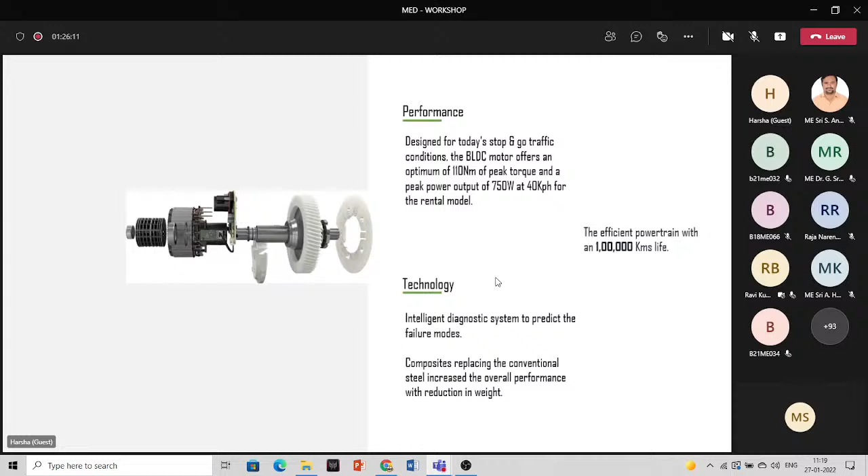Guys, you can raise your hands for any question. Whatever doubts you have, you can raise your hand. It doesn't have to be about the company—you could ask about any technology part or the electric vehicles part. You could ask about anything, like company formation or how to build a company. Anything at all, because after probably 11:30 we'll start our new session on the shift to electric vehicles, which will be more technical.

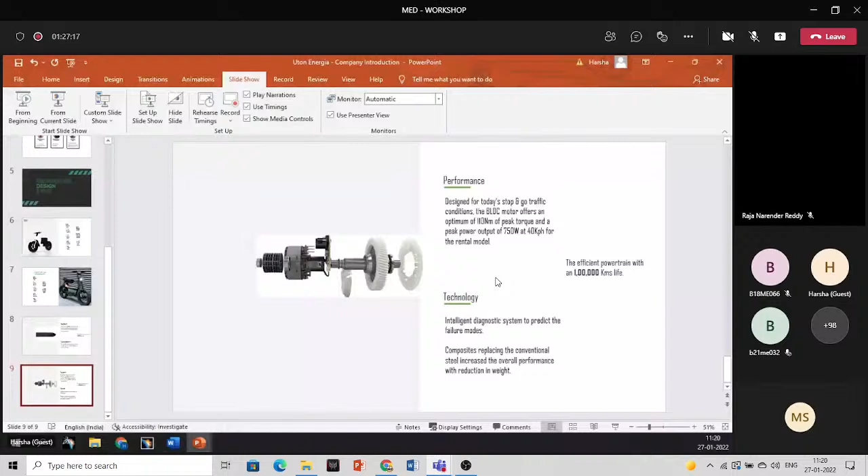Yeah, thank you, Harsha, for a wonderful presentation.

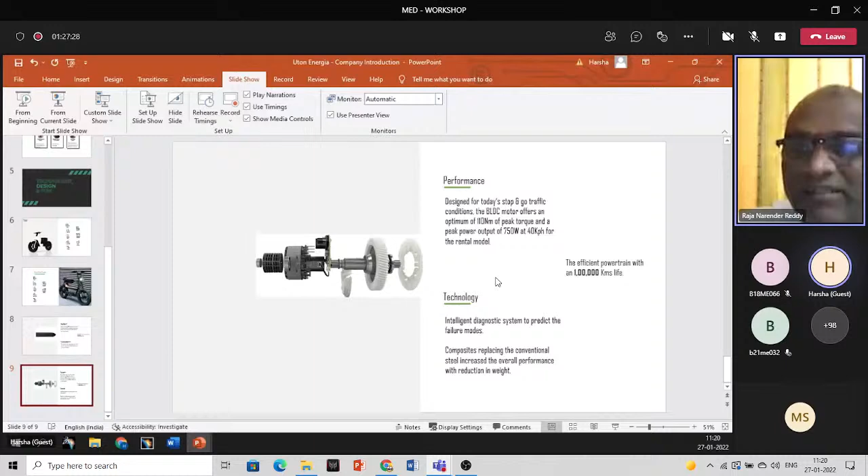Thank you, sir. While others think of questions, can you please share how you got the idea for starting this company, so other people can think about it too?

Yes, sir. I'd really have to mention one point I forgot—the technology entrepreneurship program in the college. I forgot to mention that, because you were also part of it when we were in college. You and Srikant sir were initiating us to do this.

I'd say that helped us, first of all—and I'm not saying this is only about building a company alone. Whenever you're doing a final year project or have been assigned different tasks, there's a different approach you have to stick to. That's what I'd suggest to everyone here, everyone present—there are different aspects to it, it need not be a conventional approach.

It need not be an approach that is already present. You can build your approach in a different way. What I suggest is to start thinking, build your own approach to what you want to do in the long term. So when you start thinking about what you want to do, it might not be starting a company. It might be when you're joining a company.

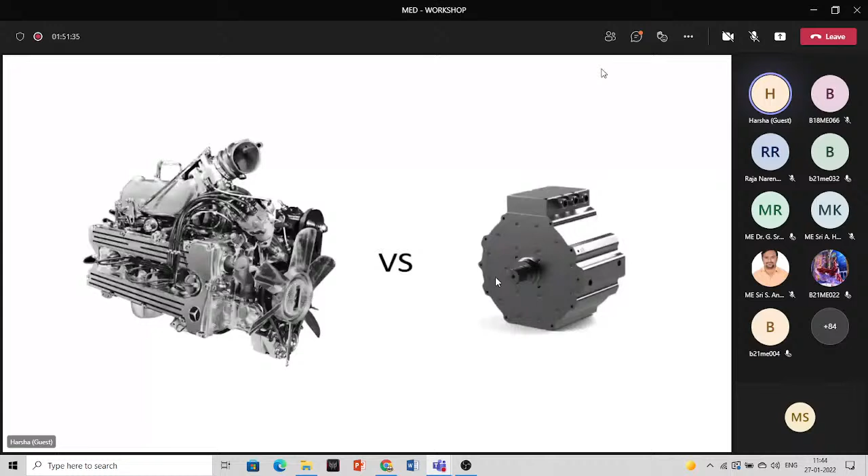Now why is there a need for a shift to electric vehicles? Let's discuss the shift part, then go into the electric vehicles part. I'll first go on to my next slide, then come back to this. So here is a small thing.

I'm taking an example of a four-wheeler car now. For a car, when comparing an electric vehicle to IC engines, what is the difference? I've put it into three contributing parts that help you understand why there is a need for the shift. If you're taking the moving parts in electric vehicles, it's hardly 20 to 24 components for a four-wheeler, compared to a lot more components in an IC engine.

Then there's wearing, when you consider a lifetime. My car has done 1.35 lakh kilometers, and I'd say my engine is really good, it still runs very smoothly, and the components are still smooth. That's where your basics of engineering come into picture, like material properties. Consider aluminium versus steel - aluminum has a lot of wear when it undergoes a lot of friction.

That's the reason if you consider brakes - we talk about efficiency and lightweight, but even in Formula One or high-end cars, big brake manufacturing companies like Brembo still use high-end steels, or now they're coming up with Kevlar and carbon fiber. That's highly costly, but companies still use steel because your key basic point remains the material property of it.

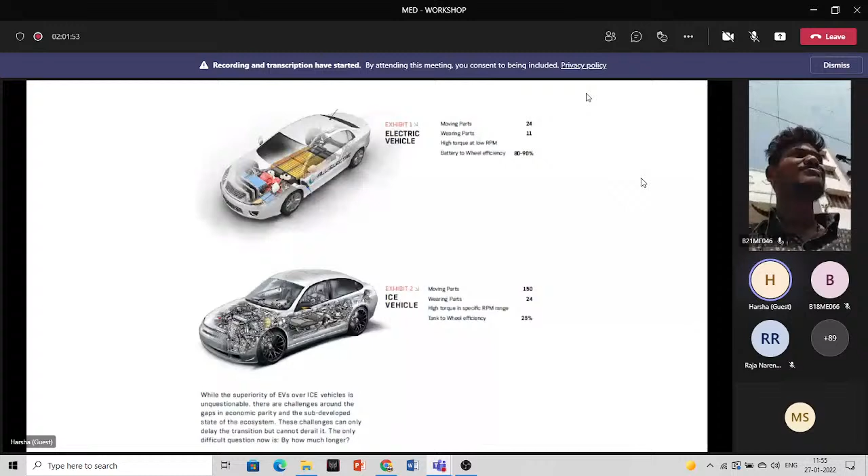You know, like last time, the first slide we have seen is that we have imported more gasoline than some countries' GDP even. So that's how the thing is about the Indian auto industry. But compare that to the global auto industry.

So why the shift? Basically, these are the contributing factors. Energy is the key thing that people actually want now, and the technology behind it. Saving fossil fuel, these fuels can be used in different applications. So that is the need for this transition. You're shifting to a smarter technology, you're shifting to a greener technology.

And there is a contradiction; people always say that your energy for the battery is coming from thermal plants or industries or something. How many of you know that we have close to 250 or 300 charging stations in Hyderabad, out of which 100 are built under solar roofs? And there are 10 battery swapping stations in Hyderabad, of which 6 are built under solar roofs. And overall, around 25 in Bangalore, of which 18 are built under solar roofs.

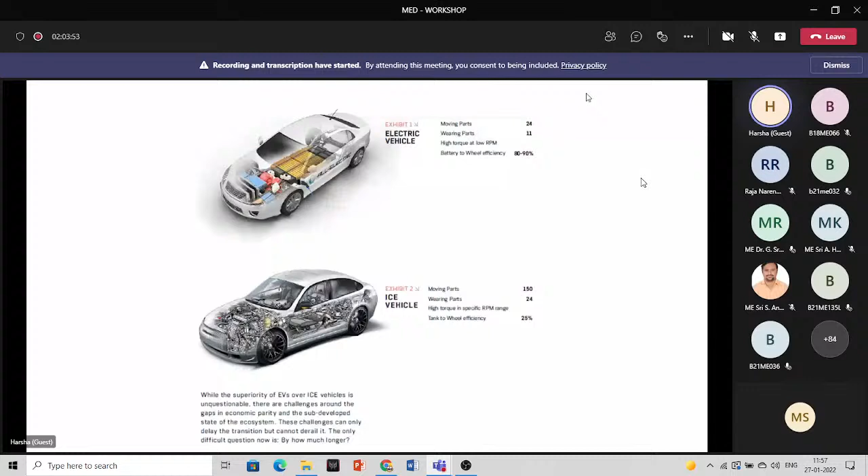So there is always a contradiction; there is always someone who says this is wrong. But what I tell is, this really is a form of greener technology. It actually provides you clean mobility. Those pollutants that come across are not really required. So that is the reason a transition to this technology would be needed.

Now let's go deep into the technical part of it. That's our core thing: why do we need to shift? So basically, let's talk about the engine. I'll be listing out only the major components, not down to the nuts and bolts level. Coming to the engine, you have a piston base. You have pistons, cylinders, spark plugs, air intakes. Then again, you have exhaust pipes, radiators.

Then you have drive shafts, and what they say is, out of these 150 moving parts, close to 100 are present in the engine itself. More and more moving parts. As you must have heard of moment of inertia, inertial mass, right? What you currently are, sitting, is a normal mass. Inertial mass defines the state of your mass.

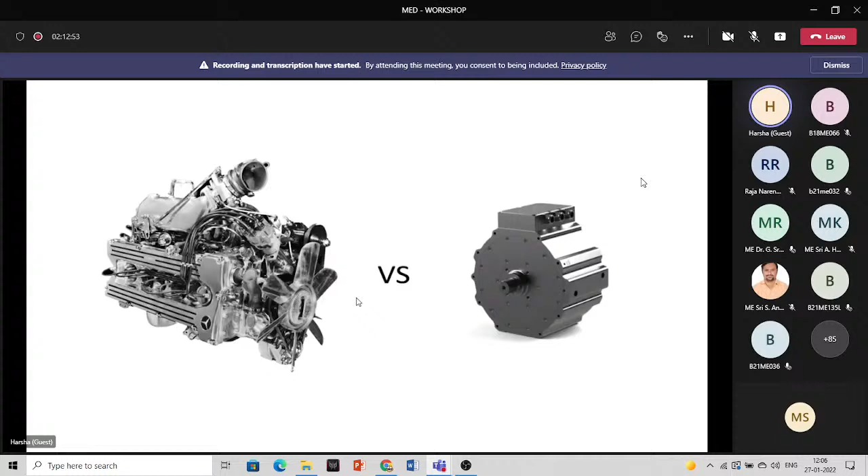So what happens when your rotation is solely in the wheels? The one you see in the picture has a shaft, the shaft has a sprocket, and the sprocket is connected to a chain drive that drives the wheel. This is what an engine does, and also a motor does. But when you're putting a hub motor, clubbing a motor onto the wheel directly, the key challenge would be the inertial mass, because initially the weight of the wheel was 2 kgs.

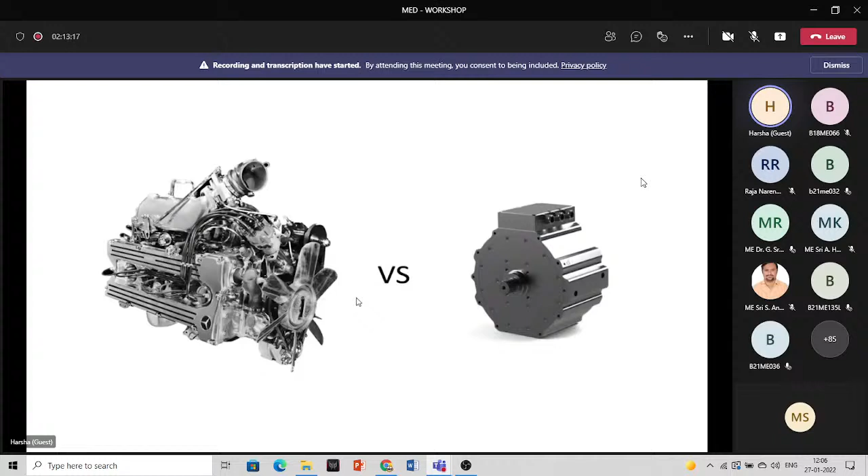Now with the motor, the weight of the wheel plus motor has become 5 kgs. Now my inertial mass is quite higher. What I'm trying to tell here is everything has positives and negatives, pros and cons.

So what factors contribute to the shift to electric vehicles? This could be a real efficiency booster, energy booster, and other contributing factors. It hardly consumes your pocket - for electric cars you could run 1,000 kilometers on a 5,000 or 2,000 rupees budget, but not the same with fuels.

Then there's the environmental impact. There's no scope for pollutants and all. So yeah, and that's not the whole thing. Here comes a key part actually.

So when you don't have more moving parts, it doesn't go through higher wear and tear. So it doesn't need frequent servicing. Your vehicle need not be serviced on a regular basis. I note this point because companies tell you that they'll service your vehicle every 2 to 3 months. With electric vehicles, there's actually no requirement at all because these have very less moving parts. So service is not required every time.

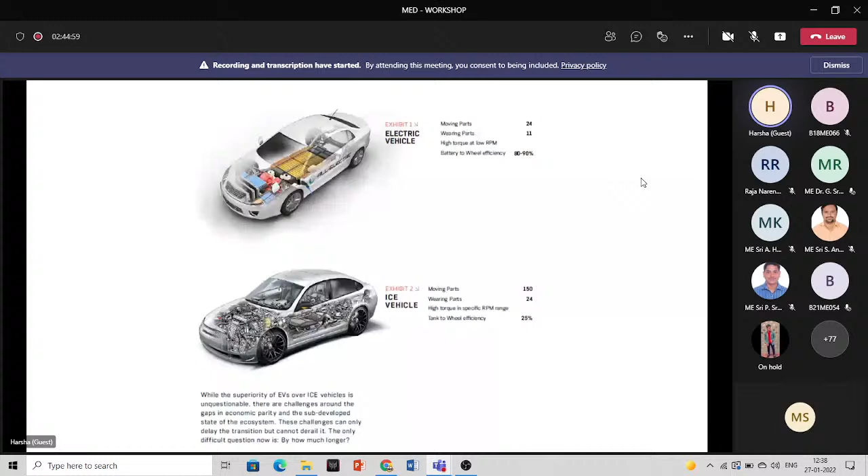So these are the new things happening in electric vehicles. Mild hybrid has always been there. Full hybrid, Toyota Prius is one good example; it is the most sold hybrid car across the globe. It's been there for the past 7 to 8, even 10 years.

Plug-in hybrid is very less used. But battery-powered electric vehicles have grown; you can see good companies like Tata coming up with the Nexon EV, Hyundai coming up with the Kona. There are good models coming up as battery-powered electric vehicles.

Fuel cells, I would say, don't have much development happening so far. Whatever vehicles are on the road are just in the prototyping phase, or early adoption phase, testing with a few people on how this runs. So this is about how you could use the technology of electric vehicles' battery and motor to run the vehicles. These are the types of electric vehicles, I would say.

So yeah, going deep into, as I told, the path. Just give me a second.

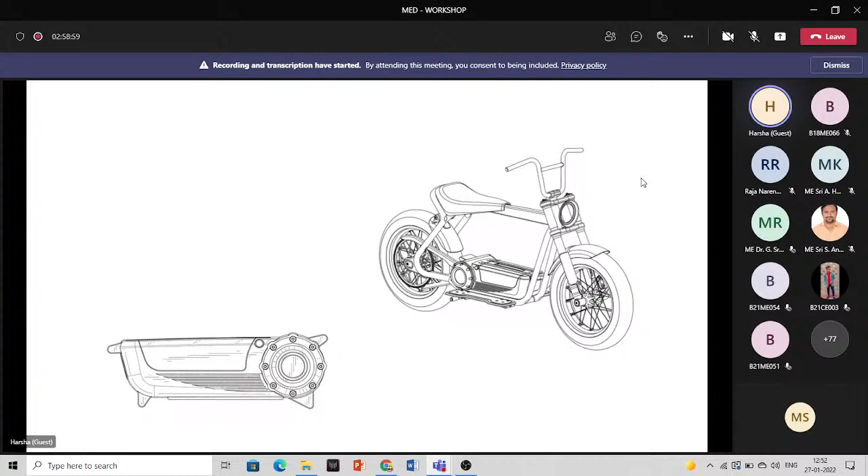So yeah, that is with the battery and drivetrain. You have motor, controller, and other components as well, like drive system again. You have chassis and body parts like tires, wheels, brakes, suspensions. Then again, you have chassis, seating system, steering system, drivetrain, everything. So other systems, equipment, and components would involve any other IoT parts that you are connecting to the cloud, or it could be any other components as well.

So yeah, I'll just conclude this session with the next 2 to 3 slides. So with what we have learned, what we have seen with electric vehicles so far, and why is there a difference, be it with components or be it with technology, what are the challenges that you face?